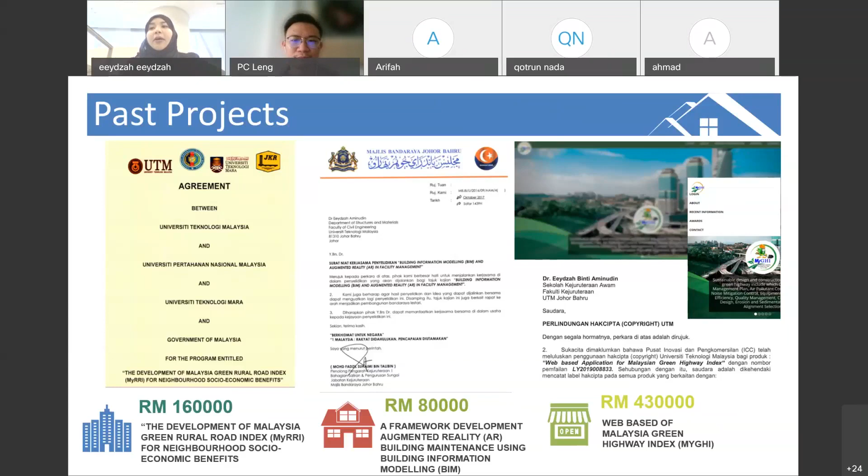So currently, if you can see, this is my previous project. I have several projects together with Dr. PC. Currently, I'm developing the Malaysian Green Rural Road Index. This is under Prof. Rosanna's project. And back in 2017, I did research on AR, mainly for BIM. Currently, I'm one of the team for a web-based carbon calculator for MyGHI, Malaysian Green Highway Index, under Lembaga Lebuhraya Malaysia.

So like I mentioned last week, we just launched the Construction 4.0 strategic plan. I'm one of the technical team with CIDB and CREAM to develop the construction strategic plan.

Okay, a part of my program with all the industry. And currently, if you can look into it, we have moved towards AI, artificial intelligence, and also BIM. So this is what I currently did for my study. Okay, so that is a bit of background about myself, and now we're going to focus again back on

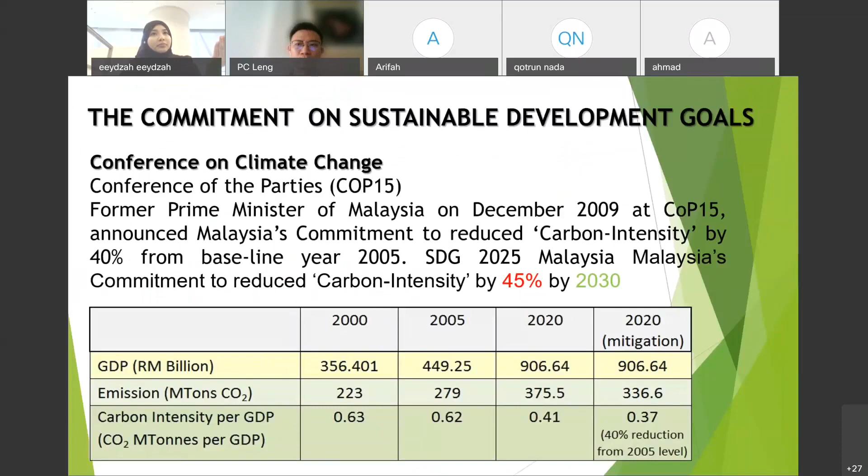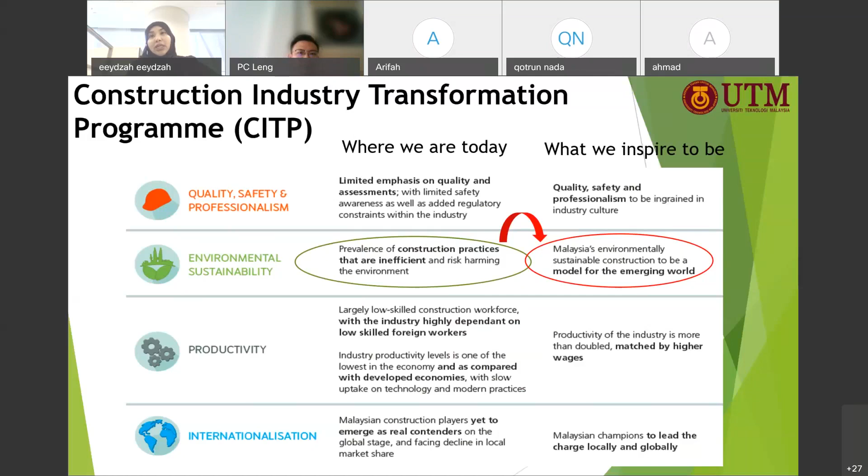So again, I think we skip back, sustainable. Sebab I just want to touch in, kenapa as a researcher, as a student, bila you come out into master's program macam ni, you always have to think sustainability is because our national agenda also is focusing towards environmental sustainability. So if you have an efficient product, a very good product, try to link back with our national agenda, because what you did is actually aligned with what national agenda is focusing.

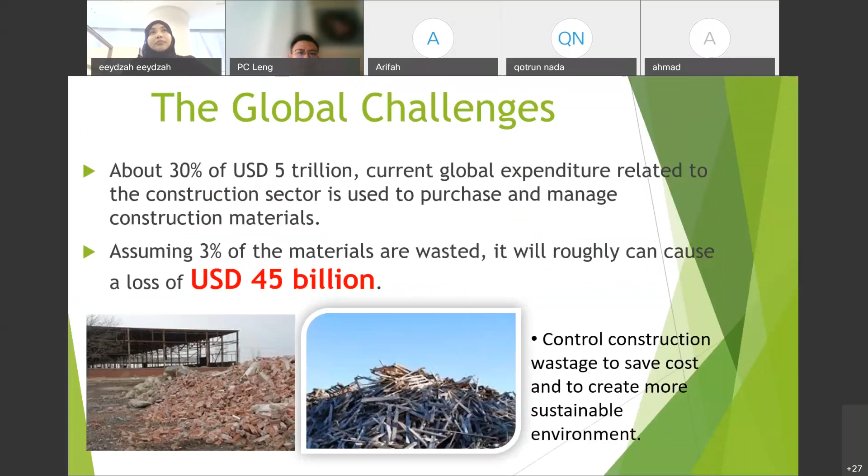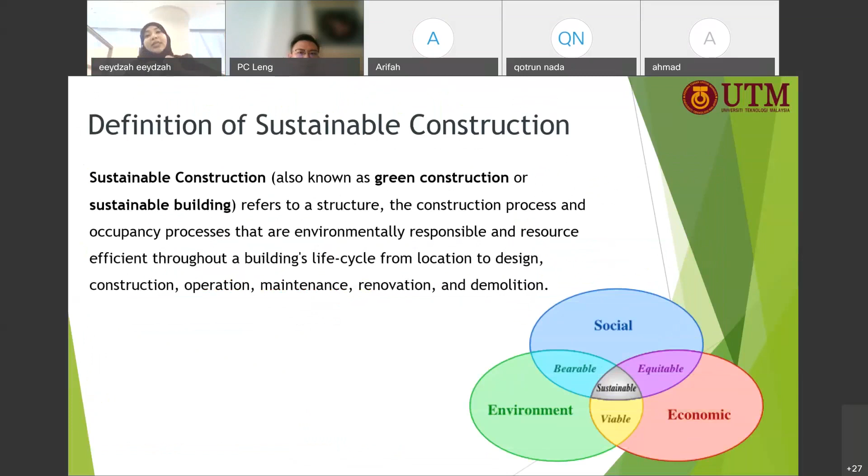And then when we talk about back to our national agenda, sebenarnya they try to reduce the waste. So what I'm trying to do now is actually to combine the idea of bringing the waste into the sustainable initiative. And a part of it, of course, I try to reduce the carbon emission. I can say my research is more on cradle to cradle, kita tak create end product towards waste, tapi instead of that, we use the waste to generate back into a new product that can be used as a benefit product.

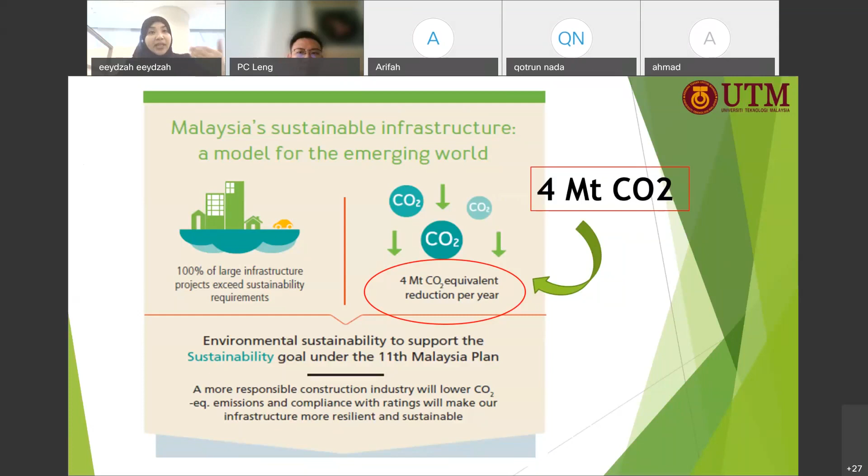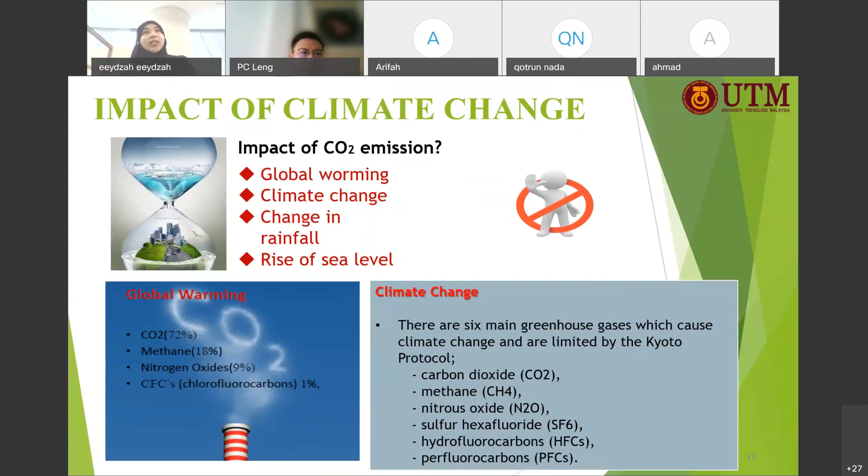Of course, kenapa again kita tengok into the phenomenon of climate change is because why the material that we develop must focus on the climate change issue, because we try to overcome. Kita try to cut off the emissions so that we are not contributing towards CO2. That's the reason why as a researcher, as an engineer, as an architect, you guys have to always think about how to overcome the climate change issue. So coming back towards the thing that we try to bring up for today.

Kalau kita tengok global warming, the urban heat island issue, when it has a high solar radiation, this solar radiation is gonna penetrate into a building. So of course you guys tahu dah pasal what does it mean by microclimate, what does it mean by warmer and cooler. So kalau kita tengok bila kita ada banyak pokok, all this pokok are gonna absorb the CO2. But at the same time kita dah tak boleh nak elak.

In our normal building, of course, when the heat penetrate, all the materials started to absorb. So the phenomenon that happened here, heat going to transfer to our material, and by heat conduction, some of it going to absorb in, and some of it gonna reflect. It depends on what kind of material that we use, but most of the material is going to start to absorb.

And the byproduct, for example, bila kita jalan dekat building tu kan ada exhaust daripada kereta. Okay, they're going to create a waste heat, anthropogenic heat, yang akan menyebabkan heat surrounding tu lagi panas. So you bayangkan bila building tu dah started to absorb the heat, some of the heat dia masuk kat dalam, some of it dia akan release keluar. Ada yang dia tak naik ke atas, so dia akan still stay dekat sebelah kita.

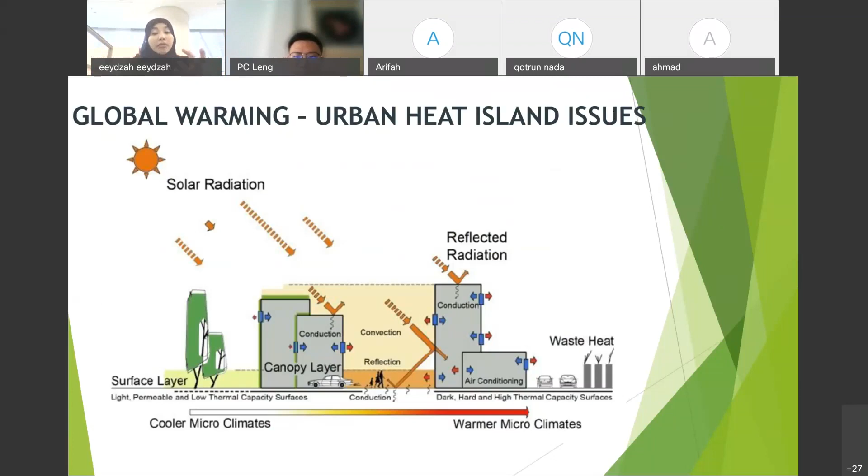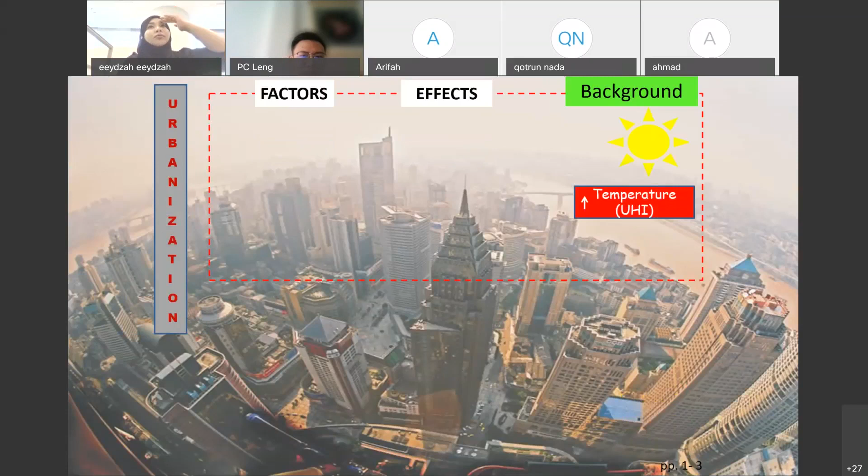So that's the reason why, when we want to start off with doing research, we have to know what is the effect. So when I started to come up with the research, I tried to focus: will the material that we're going to develop actually have the evaporative cooling? Does the material have high heat absorption? Can it produce a lot of waste heat? So these are the things that we have to think of in order for us to overcome the urban heat island issue.

So kalau kita tengok macam tadi yang saya mention, bila ada lots of building, kita akan produce a lot of heat, waste heat. So that comes from cars. Albedo pun very important. Sebab tu macam kita pergi kat Japan, most of Japan they try to have high albedo. So kalau macam warna putih tu satu, but actually it's not good sebab putih ni dia akan sakit mata, tapi sebenarnya dia bagus in terms of dia tak absorb heat yang terlalu banyak.

So that's the reason why we have to know how to play around in between albedo, the heat performance, and our solar reflectance. Sebab solar radiation ni pun dia ada pelbagai value. It depends on our peak sun. Later I'm going to show you what does it mean by heat solar radiation.

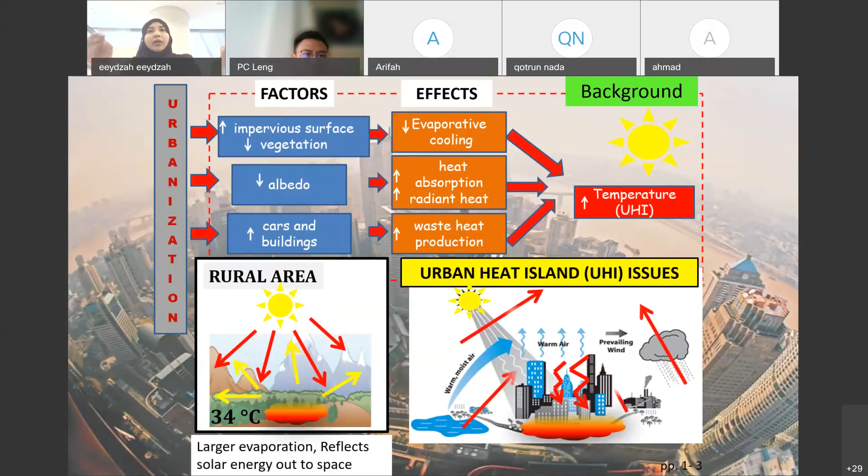So far semua orang okay tak? Boleh ikut tak? Are you guys okay? Do you guys understand my lecture for today? Boleh follow, because it's a bit technical since I'm a civil engineer, so we have to dig in why this thing happened. So if you guys have questions, just interact with me along the way, okay?

All right, so this is the relationship between surface and ambient temperature. If you can see here, during the hot and humid, especially during the midday, when the high solar reflectance, cuba teka. I want you guys to give an idea. In between 12 to 4 o'clock, in our tropical climate, what is actually the peak of the solar radiation? Can anyone guess? In between pukul 12 sampai pukul 4. Sebenarnya pukul berapa? At what time is the hottest based on our tropical climate?

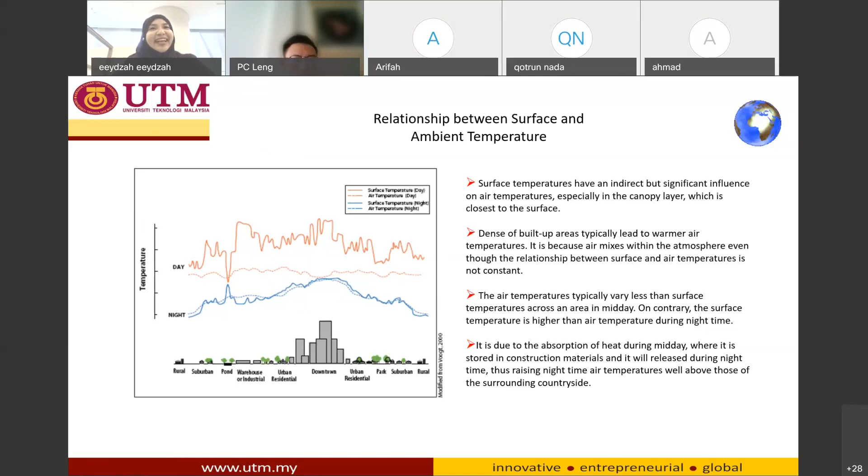3. Okay. 1. Satu. Okay. That's the best you guys can give? 1, 3. Okay, let me show you. Banyak lagi lecture ni. Okay, tak apa, kita cuba cut it short. Okay, actually it is, alamak, tertukar pula.

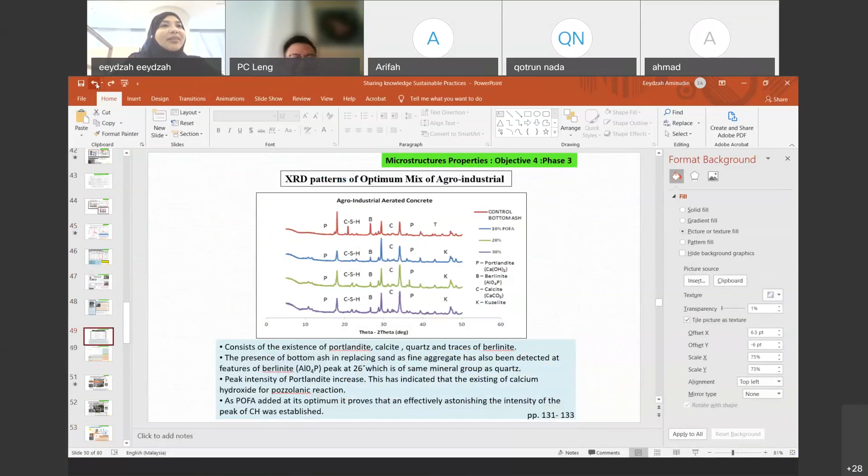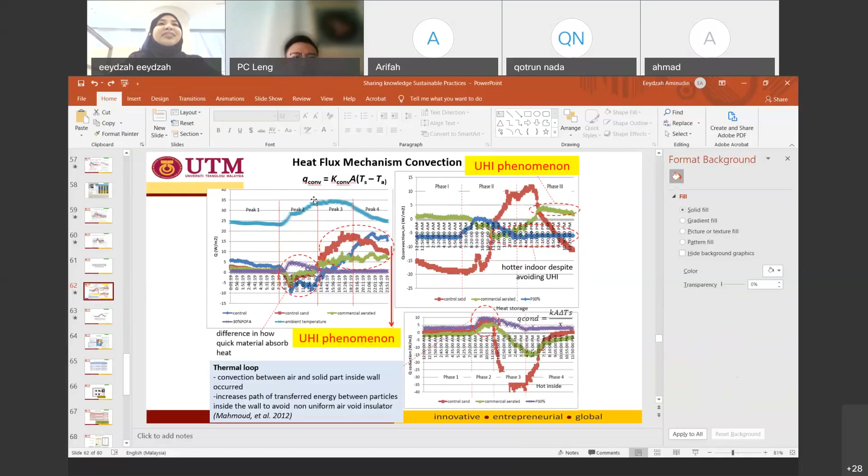Okay, I want to show you it's actually in between 1:45 to, green, red. Okay, kalau kita tengok kat sini, it's actually between 1:45 to roughly the peakest is about 3:30 macam tu. Can see here? Okay, so this is actually the peakest time lah. I mean, it's about 2:45. Nampak tak? Dia punya peak.

So this is actually our peakest point in our tropical climate. So jangan keluar lah. In between 2:45 roughly kan. Start pukul 1:45 ni sampai pukul 3:04 ni is actually the peakest point of our tropical climate. Okay. So betul lah tu, pukul 1, pukul 3 tu betul lah. Sebab this is actually the peakest hour, peakest point. Okay, nanti I'll show you the solar radiation later on. Dia actually based on solar radiation lah, sebab kita akan tengok our solar radiation. I'm gonna show you later on.

Alright, so far can follow? So sebab tu it's quite dangerous lah if we go out in between 1 o'clock to 4 o'clock tu, kita boleh terkena heat stroke. That's why it's very important for you to know the peakest point. And normally my students kan, kalau dekat construction industry, a lot of my students, especially yang dekat PNB ni, diorang memang banyak yang kena heat stroke. Sebab the higher altitude you go, the higher tendency of heat stroke that you guys gonna face.

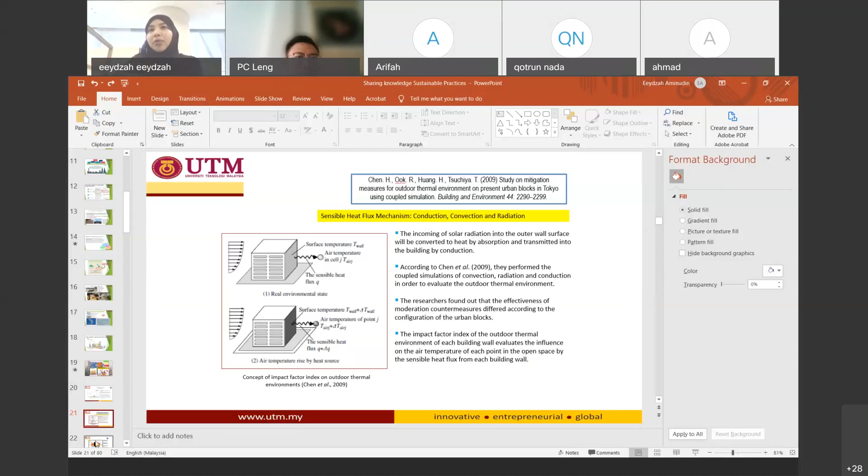So it's very important for you to know which exactly time. Kalau waktu hujan is okay, but if it's hot tropical peak hour, it's not good for your health. So try to know, okay, you know already 1:45, so boleh tapi you kena berjaga-jaga lah, minum lots of water, so that heat stroke will not occur at your body, right? So

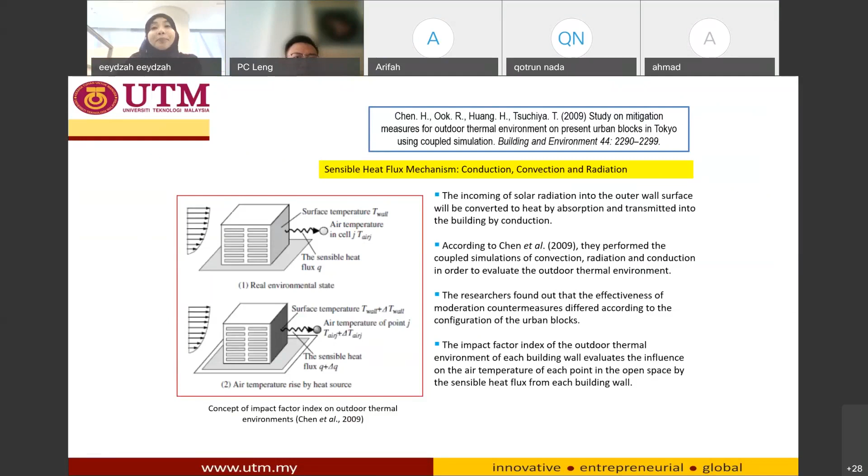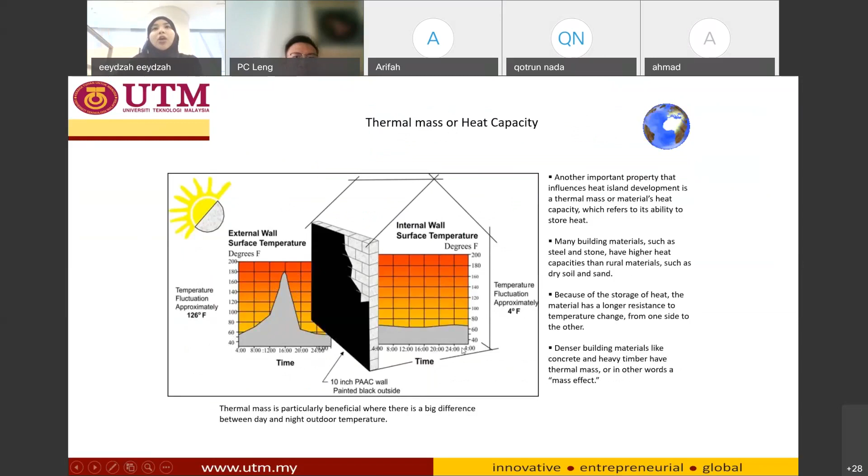Okay, for my research, basically what I'm doing is that I try to get an idea what is actually the external wall surface temperature and the internal wall surface temperature in terms of aerated concrete. So looking back on the conceptual idea on how the heat transfer is, kalau kita tengok solar radiation, panas matahari, the sunlight, they have this solar radiation, and this solar radiation gonna radiate at our surface of any material. We're talking about building. Sekarang ni I'm talking about building, and the radiation will increase dekat surface temperature.

In order for you to develop, to think of what is actually the suitable material, is to have the one that have a very less heat flux. Kita nak a very less thermal mass, because kenapa kita nak material yang absorb rendah dekat dalam material, sebab every material memang akan absorb heat. Tapi material yang absorb the less is better, sebab dia tak akan simpan the heat flux dekat dalam, the thermal mass. So in order for you to do a research is to have a very less thermal mass, and basically we are looking into the very low thermal conductivity.

Sebab lagi rendah thermal conductivity, the better in terms of thermal insulation. So that is the idea, to have a very low thermal conductivity, but at the same time a very less thermal mass, sebab kita tak nak heat simpan dekat dalam kita punya building. But of course they're gonna keep in, but some of the material is gonna release cepat. So the good thing about the material that I produce is that dia simpan haba sekejap, dan dia release haba pun cepat. So nanti I'll show you, pukul 6 tu dia dah start to release the heat dalam material, sebab of course semua building dia akan serap haba, tapi yang mana yang lepas haba cepat, itulah yang very good. That's why if you can see for the low cost house, normally they are using sand brick.

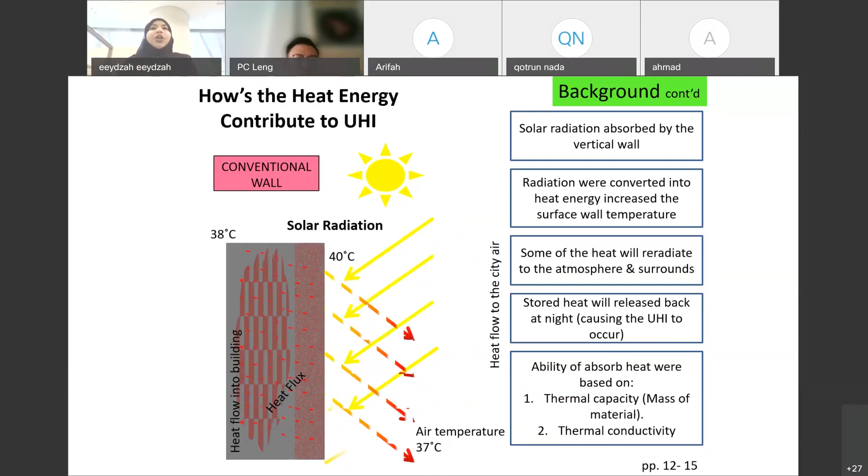Okay, so again, this is actually the heat transfer process. Bila kita kata kat luar ni, ni contoh dekat bahagian luar, sini bahagian dalam, solar radiation dia transmit dekat kita punya bangunan. Depends, ada yang long wave, ada yang short wave. Kalau long wave dia akan keluar, ada yang reflected, dia akan keluar.

Okay, dia pantul dekat material, dia pantul balik. Maknanya kalau when the solar entered to our material, part of it going to radiate, reflect back. So it depends, some of the heat akan transfer. That's why we have to study in terms of the material performance.

Antara dia, macam I mentioned just now, thermal mass and also thermal conductivity. That is the main yang kita boleh nampak secara material, yang kita boleh buat terus study, kita boleh test terus, adalah thermal conductivity dengan thermal mass. So from there we can actually identify the potential of this material, is it good or not.

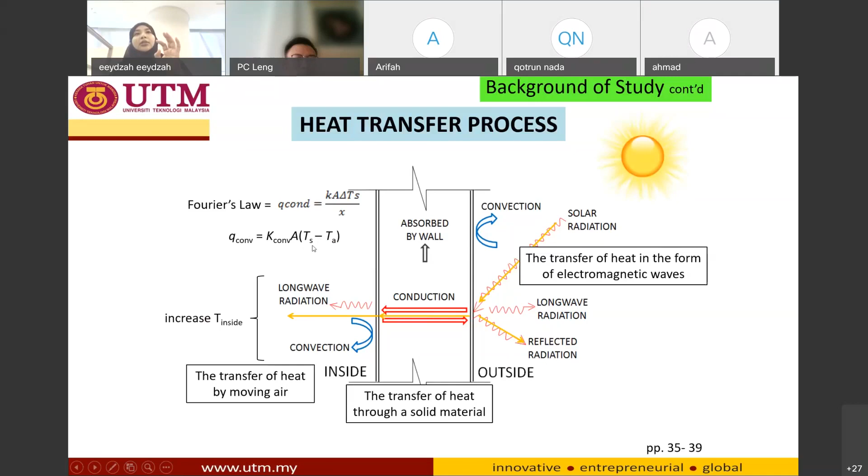Okay, so adalah beberapa equation that we have to calculate in terms of calculating the heat convection. This is convection, we have to know the K convect, and then the area, the surface, and also ambient temperature. So there's a few equation untuk kita kira the heat tu sendiri.

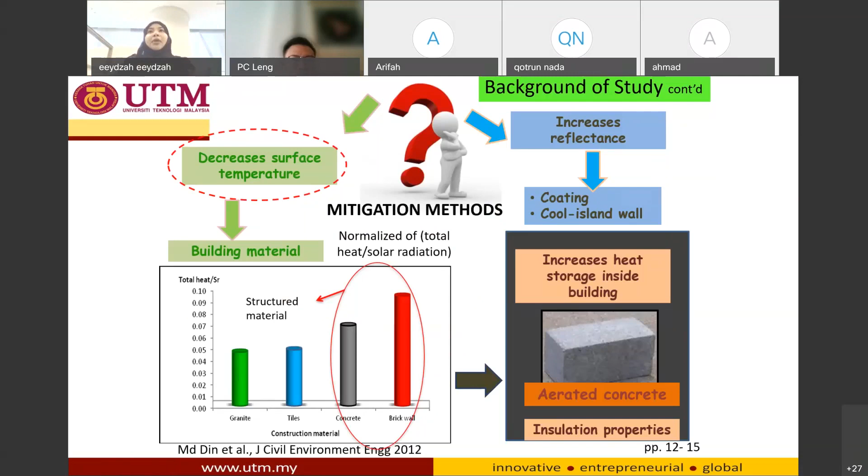Okay, so looking back into our aerated concrete, normal aerated concrete dia punya density is ranging in between 400 to 900. Like I mentioned just now, when we talk about lightweight concrete, it must ranging in between less than 1800. So apa-apa material which is less than 1800, it is considered as lightweight.

And the properties of normal aerated concrete, kalau you tengok, dia small pores and dia very even, compared to this is my brick, dia uneven. Tapi kita tak guna high steam. Sebab kalau you tengok kat atas ni, normal aerated concrete dia memang pakai high steam, that's why dia mahal. Tapi tadi kita nak cakap, kita nak try to cut cost, kita tak nak guna high energy, that's the reason why I try to reduce. Tapi ada drawback sikit sebab dia uneven pores yang terbentuk.

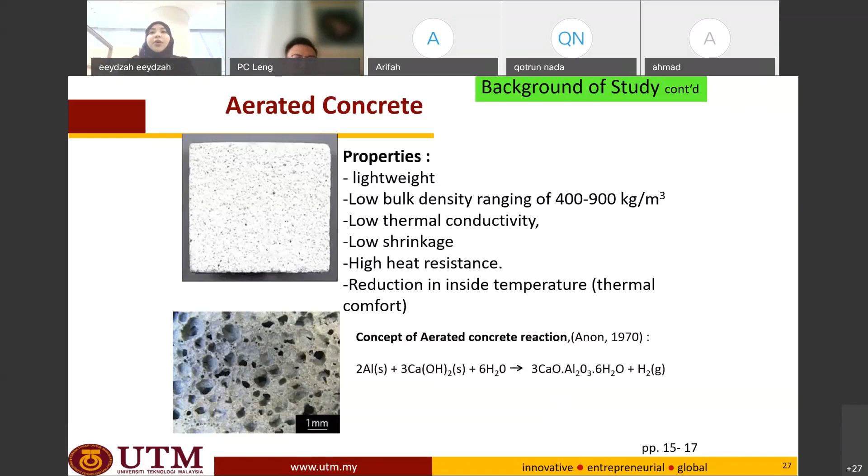Okay, so kalau kita tengok konsep aerated concrete sebenarnya dia ada alumina. Tadi kita cakap dia pakai aluminium, dia pakai simen dengan air, lepas tu high steam. So dia akan develop calcium oxide alumina yang akan membentuk ettringite. Ettringite ni macam itulah dia punya strength dekat konkrit tu. Nanti I can show you guys later what is the mean by ettringite. So ettringite ni sebenarnya yang membuatkan aerated concrete tu kuat, dia punya pembentukan. Sebab sebagai civil engineer, you need to know how the development, the properties of sand and cement, macam mana dia bentuk kekuatan tu.

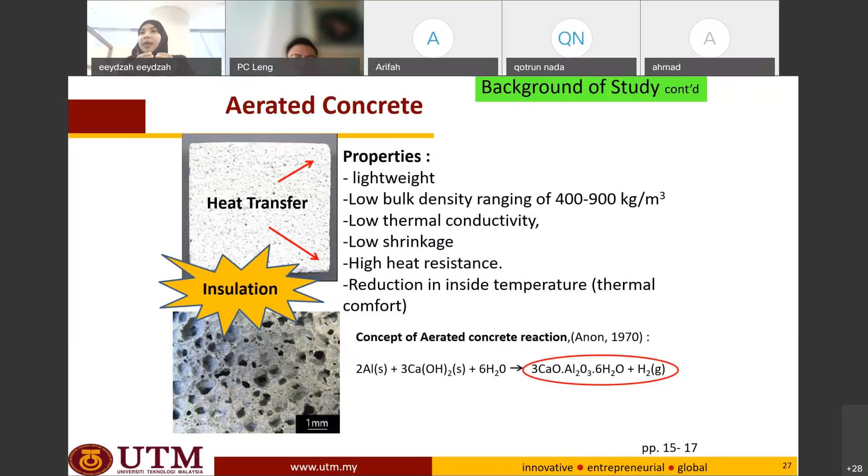So kalau macam normal, kita panggil heat of hydration kalau normal concrete. Kalau kita tengok concrete terbentuk kalsium campur air, campur pasir, dia akan bentuk calcium silicate hydrate, so that is normal heat of hydration. Tapi dalam sistem aerated concrete, dia lebih kepada ettringite. I'm so sorry, it's a bit technical, but this is actually how it develops.

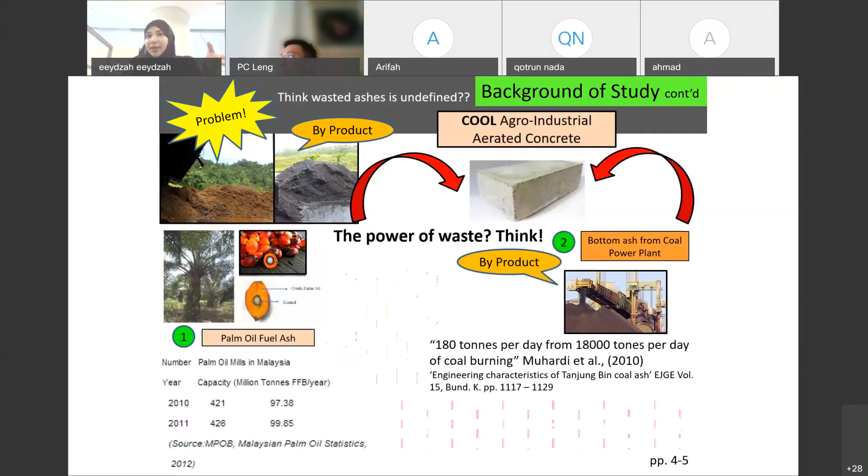Okay, so what I'm doing actually, just now saya mentioned bottom ash, I replace sand with bottom ash, and actually cement, I no longer use cement, but instead of that, using fly ash. So fly ash also, it has the same property as cement. Okay, so that was the thing that I did.

And then kalau kita tengok previous study, sebenarnya dah orang buat 2009. My PhD research is during 2010, I started my PhD 2010. So 2009 tu sebenarnya dah ada orang buat bottom ash replace as sand. Dan kalau kita tengok, tadi I cakap the lesser the thermal conductivity, sebenarnya the better in terms of the performance of insulation, so memang betul. This has been studied by Kurama, dia tukar bottom ash dengan sand, memang thermal conductivity tu makin lama makin rendah, sebab the porous that produce inside the aggregate contributes to insulation.

Okay, and back in 2013, Lim pun dia ada study, dia pakai POFA, palm oil fuel ash. Tadi bottom ash, kalau kita tengok kat power generation, electricity, yang jatuh kat bawah tu bottom ash, yang dekat atas tu is actually POFA, top ash. So POFA ni palm oil, bottom ash ni daripada coal power plant. Sebab tu I combine agricultural waste dengan industrial waste into my aerated concrete, so this is what I did.

So kalau kita tengok pun kat sini dia bagi tahu apa tu thermal conductivity untuk POFA 20% dia makin increase, tapi dia tak study sampai 30%. Yang ni maksudnya dia pakai zero, tak ada apa-apa waste, 0.65.

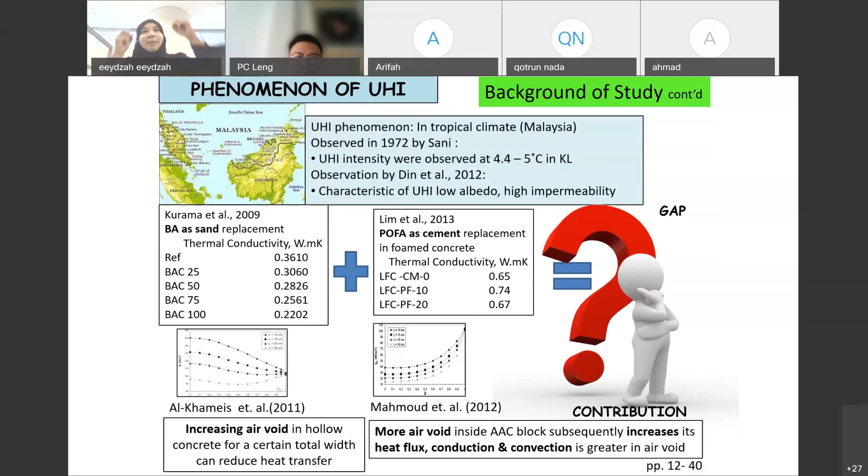It's okay, because the first year for me was my learning stage. After the second year, I got an idea for this and I went ahead and got an initial idea that actually worked, by using what we call a preliminary study. So what I did is use my preliminary study.

Like earlier, we had the idea that bottom ash and fly ash could be integrated. At the same time, as usual when you become a researcher, you want to try everything. So I did the same thing. This one is expanded polystyrene - I'm using EPS, mixed with cement, and tried to study its behavior.

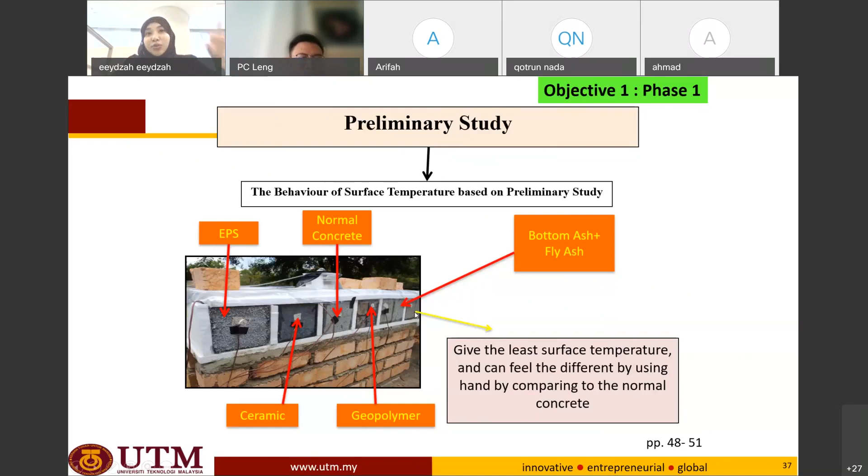At the same time, there's normal concrete, and this one is the bottom ash that I did for my research. So I just mixed around, played, and tried to test it. Fortunately, the result shows that the bottom ash, if you look here, has the least thermal heat. If you look at surface temperature, it's the lowest. So that is how I started to do my research, by having a preliminary study.

So I think there is a potential in doing this research. That's how I started off with my research. It shows that bottom ash has the least thermal effect.

Then I started to study again - when you research, you do it more, and you study its chemical composition. We have to know, like I mentioned, for concrete strength, silica and alumina are very important. So I looked into the bottom ash - the silica is 42%, very high. POFA is also very high compared to normal portland cement. So I thought, wow, there is a potential. We can see here the alumina silicate is also very high.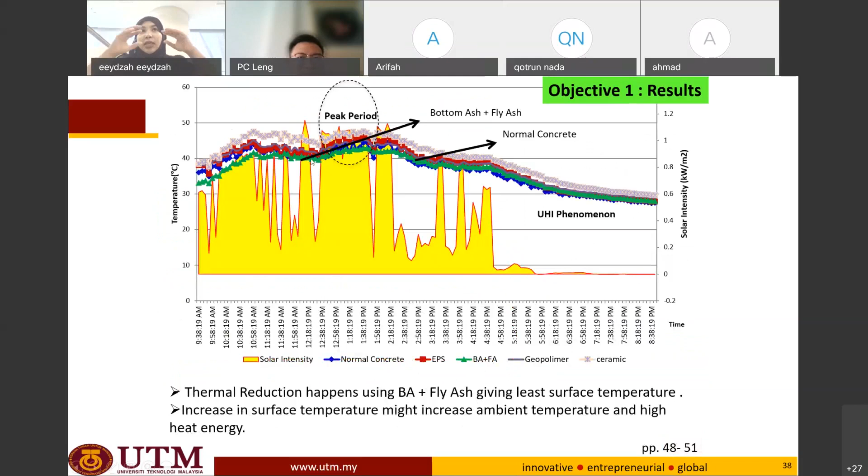Then when you study many papers, no wonder bottom ash, if you look earlier, has the least surface temperature - the heat absorbed is lowest in bottom ash. So then I tried to think - when I read, it turns out silica, alumina, ferrum and titanium have a reflective pigment. So the material that I created has reflective pigment, and it also has insulation behavior.

So I started to become happy. After a year of it not working, you change your topic, you do it again, and you see there is a green light in your research. So you start to become very ambitious. During this time, after 2 years, when you're down and you see your green light in front of you, you started to be happy.

So I tried to start doing lots of study, lots of samples - about 120 samples, some worked, some didn't, we tried everything. This is how I developed my mixing phase, whereby I'm adding the POFA, the cement, the hydrated lime, the bottom ash, and then adding aluminium powder and superplasticizer. The good thing about aerated concrete is it acts like a muffin.

If you mix it, you can see it - actually it will rise. You mix it, fill up 2/3 of the mold, and it will rise. So you'll see it become like a muffin, and you cut it off. So you know it shows your material started to rise. This is because aerated concrete is like foam concrete - there are holes created, aerated, created inside.

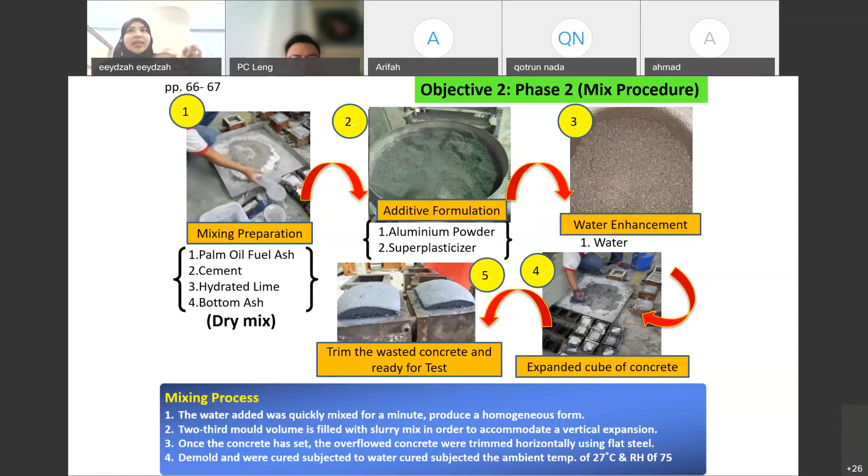So this is how I developed it, and there's a lot of study I had to do looking into the aluminium percentage, the superplasticizer percentage. From here it shows that, every time we do research on a material, we have to check the compressive strength.

So of course the control strength is very high because it is not aerated, it has no porosity. But compared with control sand and control bottom ash, it has quite similar performance. So as long as it's achievable, for a normal non-load bearing wall, we need to achieve at least 5 megapascal. So at least I'm achieving the standard requirement of UBBL.

Some more, when I add up POFA, it actually gives long-term strength, so it is high strength at later age. That's why this pozzolanic behavior creates high strength after 40 days. So that's the reason I thought the strength is going to get better over time. That's why I think it's okay, since I did achieve at least 7 megapascal.

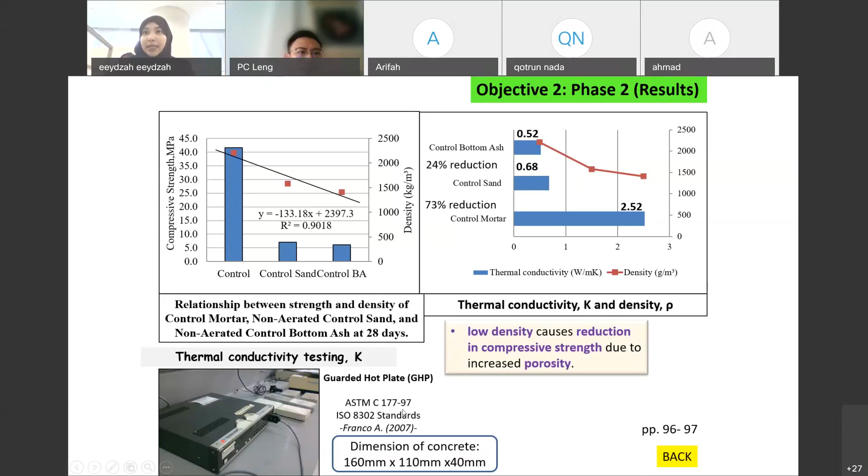Here I went to MPOB to do this thermal conductivity testing. It follows ASTM C177-97 standard. So this is my mix proportion.

Again, the compressive strength that I get - remember I mentioned, POFA, when we put pozzolanic material, it will create high strength. So after 7 days, if I'm not mistaken, we check, and after 21 days I check. It shows that 10% is actually an optimum design based on literature. They say 10% is optimum, but when I did my own research, I found out that 20% is actually the best optimum design. But then again, because I want lower thermal conductivity, I chose 30% since it's still acceptable in terms of compressive strength.

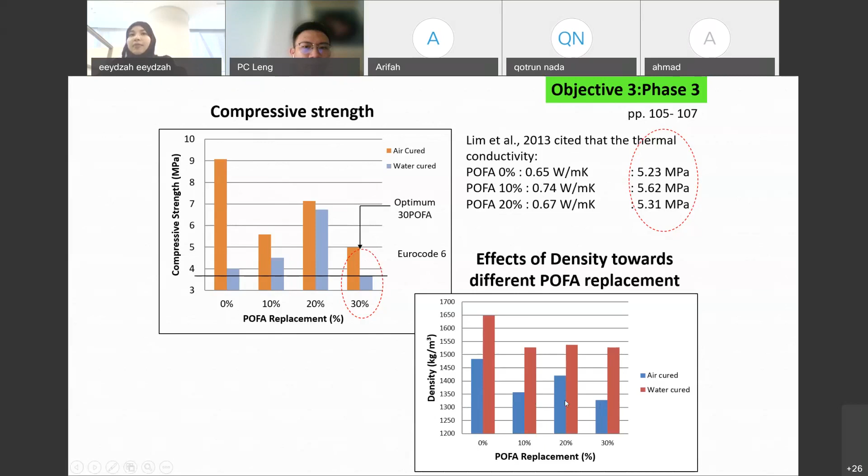This is the density. Like I mentioned, the lower the density, the better. So this is lightweight, since my material is just roughly about 1300 kilogram per meter cube.

Again, this is a study on a very technical aspect. I'm looking into the contribution to strength, and it shows that it has quite high void, but it's still acceptable, because if we look at absorption percentage, for good concrete it should have less than 3%. POFA has 6%, but it is considered acceptable because it doesn't create mold on that particular material.

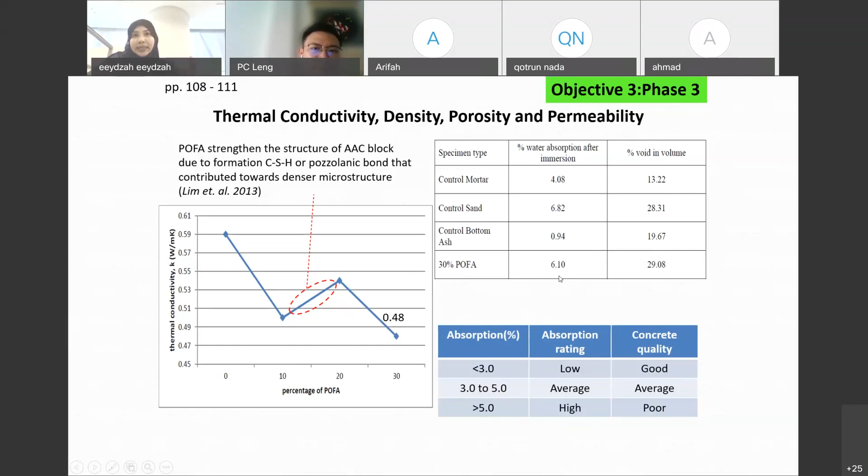So again, this is looking into the density, ranging in between 1200 to 1500. The compressive strength is 5 megapascal. I'm looking at the lower thermal conductivity, which is 0.48, as compared to commercial which is 0.3 to 0.5. But commercial uses high steam, so we try to ignore the high steam, and the porosity created is about 32% as compared to commercial which is about 70%. So it's still acceptable in our condition for this material.

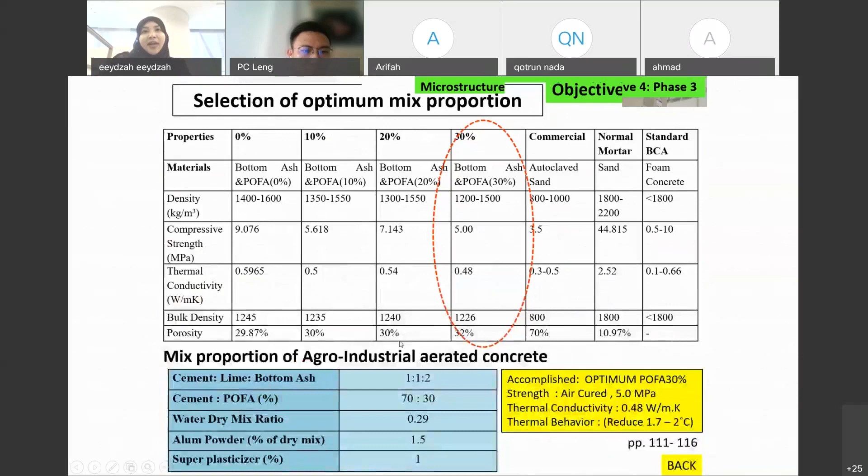And this is what my material looks like - you can see small holes were created, and I define the 32% porosity using mercury intrusion porosimetry. I did the test in Japan. I'm looking into the interparticle pore and also intercluster pore. Actually we can dig in more, we can learn more about what interparticle and intercluster mean. That is actually why there is a significant value in the thermal heat insulation performance, because there is a pore created in this material.

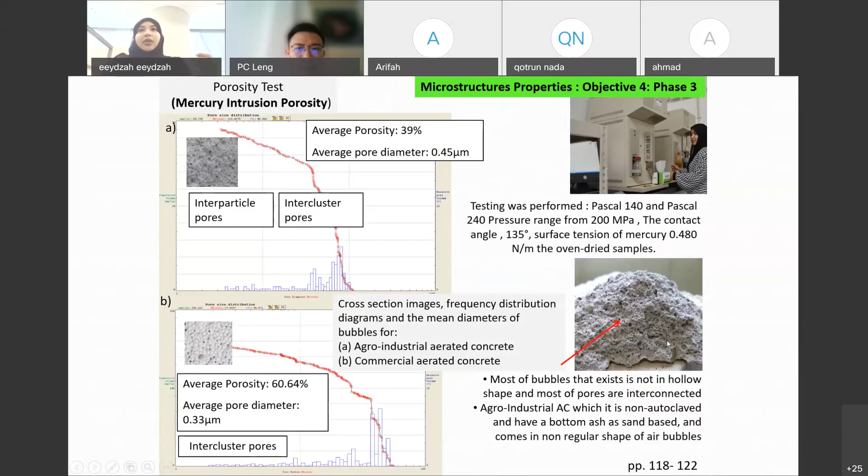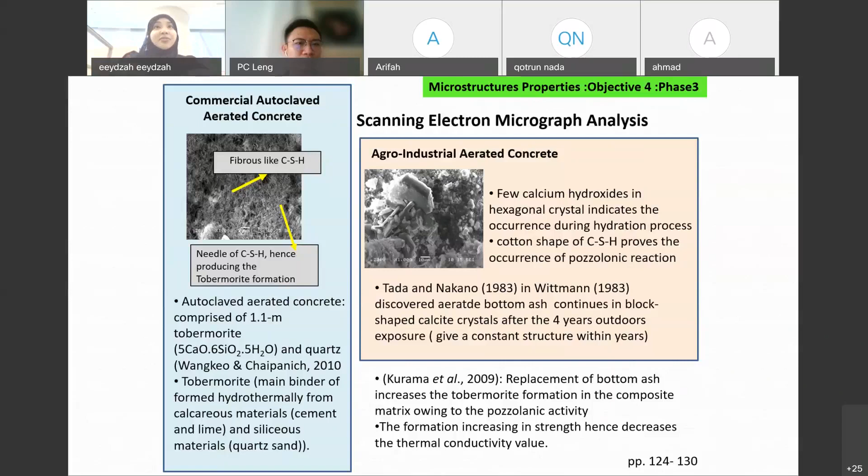Then again, I'm looking into the XRD, X-ray diffraction analysis.

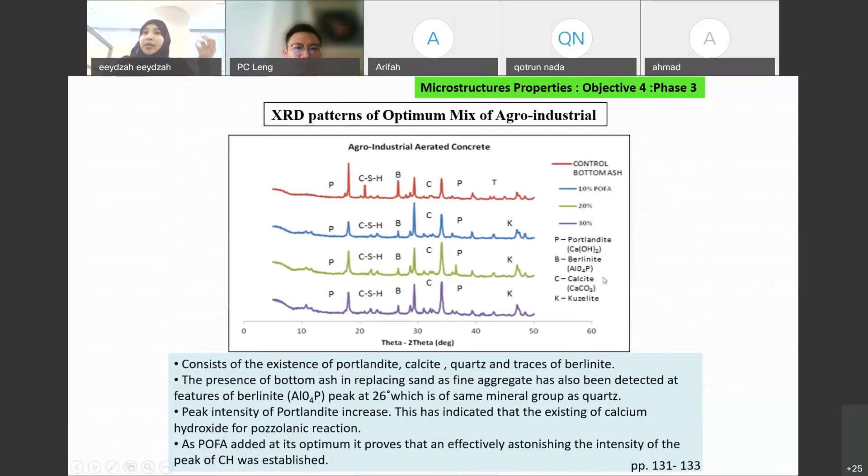How the behavior of this strength created 35 megapascal compressive strength. So how it's created, I have to go into the micro scale, and looking into that, apparently within the material itself, it has portlandite, berlinite, calcite, and kuzelite. So CSH is also being created. Calcite is also quite a lot, and that's the reason why the strength is there. Okay.

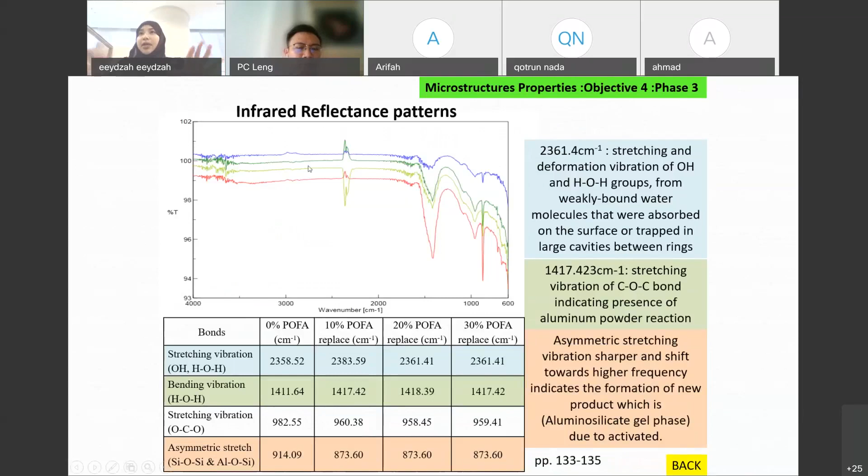This is regarding the strength as well, but I have to skip this. I think it's very technical. All right, but this is the thing that I'm going to show you as architecture students. This is how I studied in terms of thermal behavior, whereby I have a pyranometer. So is there anyone who knows what a pyranometer is?

Well, guys, can anyone tell me what actually a pyranometer is? Is everyone still there? No. Anyone, students? Just guess. Well, guys, come on. Christine Young, maybe. Can you tell me what actually a pyranometer is? You have Google. You can Google. Christine? Maybe Shahrudin? What is actually a pyranometer?

Anyone still there? Measuring. Okay, measuring solar. Koa. Is it Koa? Koa. All right, yeah, good, Koa. Measuring solar. Okay. What skills are they using? Measuring solar. Is there anyone of you that has used a pyranometer before? Nope. Koa, nope. Arifah, no, never.

Belinda, okay. All right. So this pyranometer is actually what measures solar radiation. Okay, correct, what Koa meant, solar. Solar radiation. So, as I mentioned, the solar reflectance amount is actually calculated based on the pyranometer, right? So I'm using the pyranometer to get to know the critical solar radiation on that day.

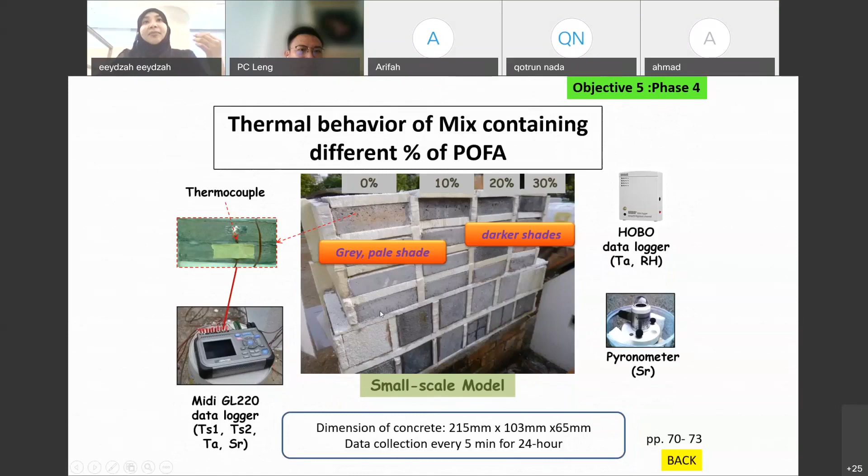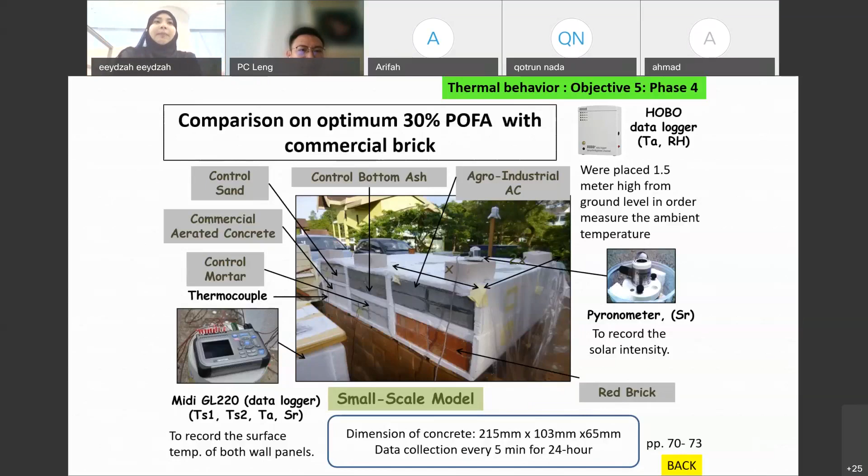So I'm measuring again after I identify, based on 0, 10, 20, and 30, what the optimum value is. And then I compared again with red brick, control bottom ash, control sand, and also aerated concrete. So from here, I did another study over almost a month, in order to check the critical maximum point of solar radiation. Because when you do research, you need to know the hottest time. We have to take the peak, the hottest. So that's why I checked over a one month period, and chose the one day with the highest solar radiation. So this is how I did my study.

Whereby I check the reflectance. I check the incident solar radiation by using the pyranometer. I also have the HOBO data logger to check the humidity on that particular day, because we want to insert the Q convection and Q conduction, the heat of conduction and heat of convection. We have to know the humidity. And I need to know the time lag.

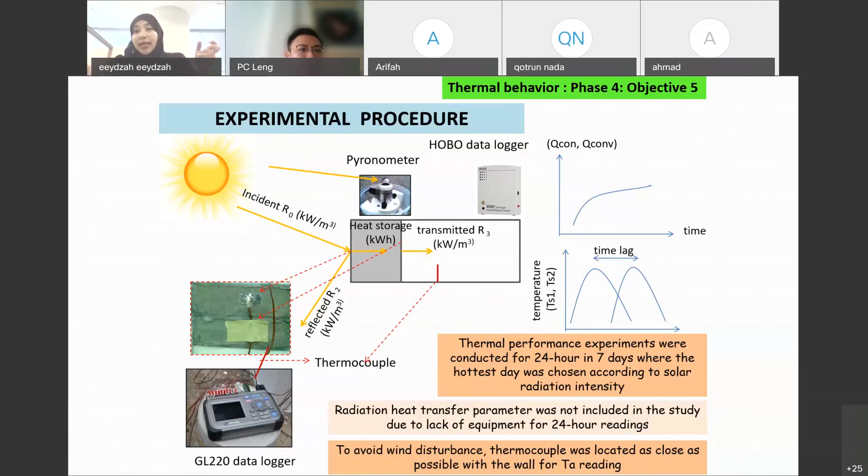As I mentioned earlier, every time heat is absorbed in the material, it creates thermal mass. This thermal mass stores and releases heat. So how long it stores and how long it releases, we call it time lag. It's very important for you to study the time lag as well. That's why you need to know when it starts to absorb and when it starts to release. So these are the things that I studied.

After studying for one month, I found out that the maximum peak is actually on 11 November. Oops, not just 11, 11 November 2012. This is actually the peak point. And if you can see, like I mentioned just now, the solar radiation peaks around 1 o'clock, it depends on the day, but basically it runs from 1:30 to 3:45.

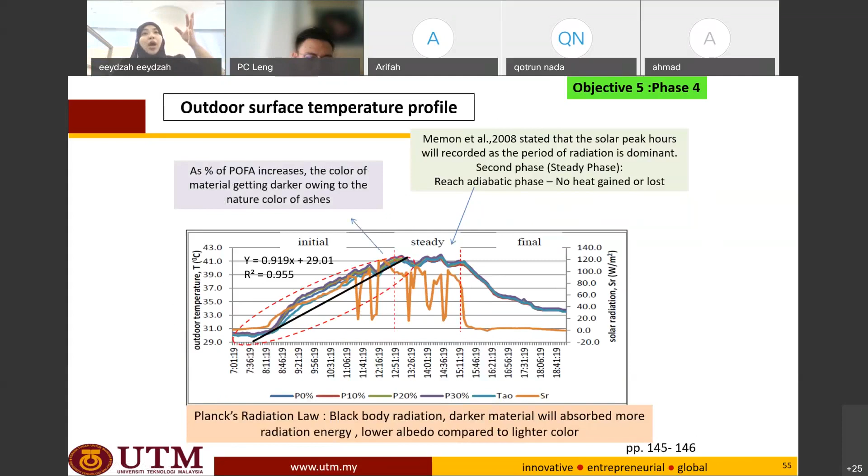Okay, and then kita tengok balik kepada kita punya ambient temperature. So from there, I'll zoom in and I studied again the performance on the solar radiation and also the outdoor temperature, surface temperature, and indoor surface temperature. I did compare and I look into how the performance of thermal in and out, the heat convection and conduction.

And from the result that I got, it shows that 30%, you can see here, the time lag is longer. So depends, if you're looking into a very good thermal insulation, we want to have a high time lag. But if you're looking into a very good thermal performance yang serap haba cepat dan release haba cepat, we are looking into the very less thermal time lag.

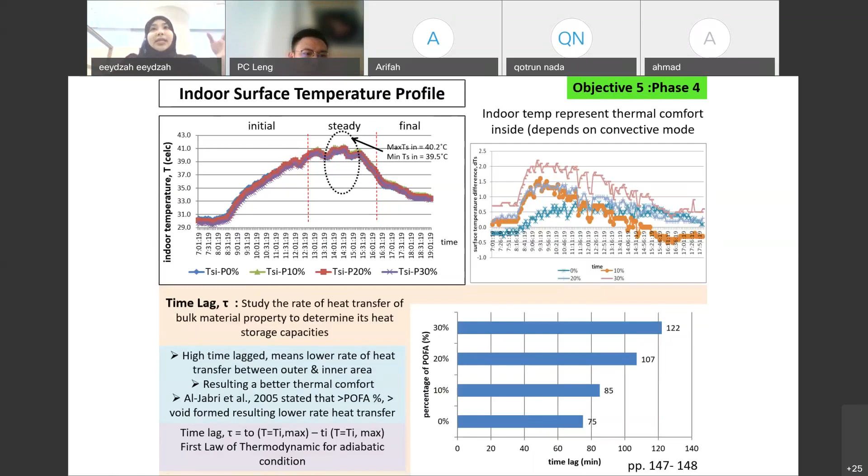But then again, kita kena tengok macam-macam possibility sebab even 0% it has a lesser time lag, tapi sebab kita nak tengok the behavior of insulation, kita tengok juga heat of convection, conduction. So it shows that yes, correct, 30% has a very high thermal insulation, but then again looking into the reflectance, kalau kita tengok kat sini, heat of convection ni maksudnya dia absorb and dia release balik that I mentioned to you.

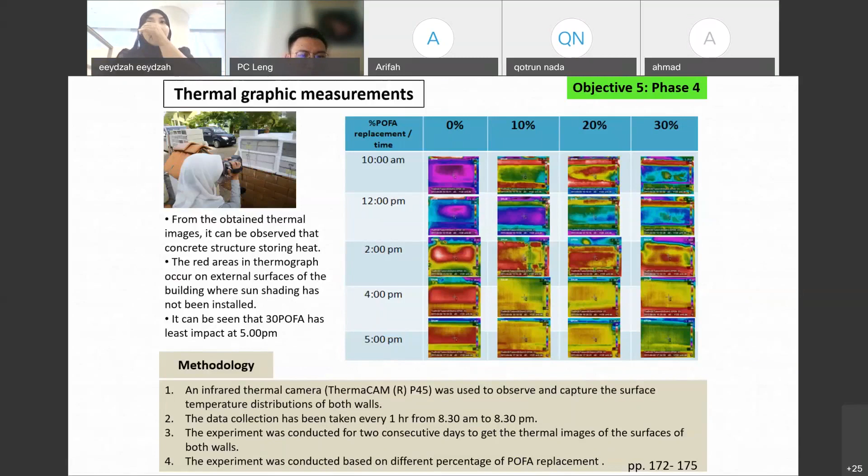So this is the reason why it is good in terms of heat of convection, tapi time lag pun dia very good sebab dia simpan haba lama dekat dalam material. So this is what I call as stored the heat, and it started to release also very fast. You can see here, heat of conduction, dia started to release, kalau untuk 30%, dia on top. So kalau positive value, it release the heat faster as compared to 10%. So this is how it behaves.

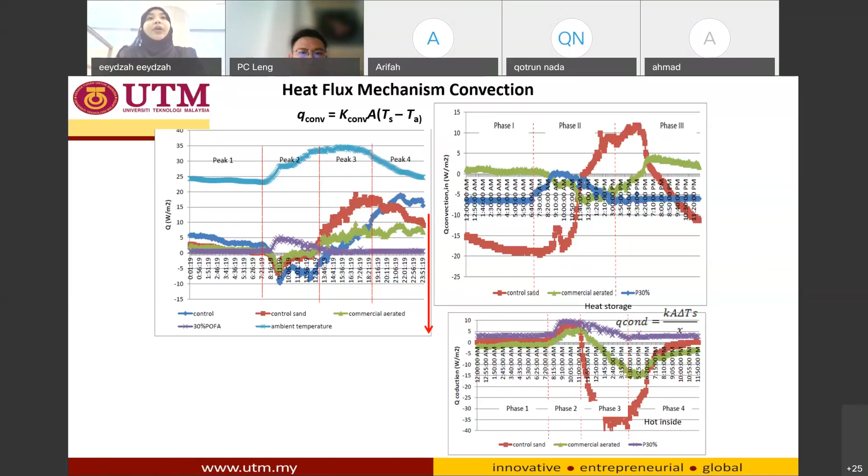30% I can say is the best, even though they have a very minimum in terms of strength value. Tadi kalau kita tengok strength dia 5 je, tapi at least they achieve the value. Right? So that is how I come up with my research, and it shows that 30% it does improve. Dia dapat kurangkan 2 degrees Celsius. If you can see here, dia punya comparison degree is about 2 degrees.

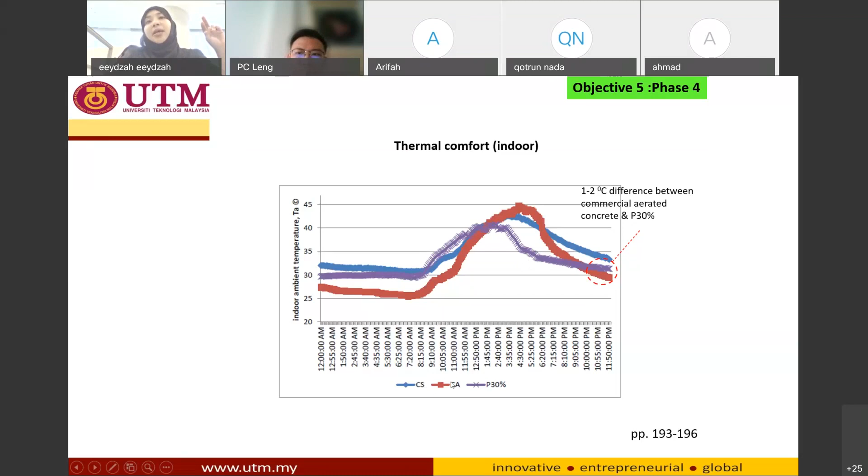So again, I can conclude that my material, dia punya thermal insulation tu very good, tapi it depends sebab kalau kita panas, thermal insulation yang terlalu tinggi pun tak berapa bagus. Tapi yang very good thing is that it absorb the heat fast and it release back the heat also very fast. Sebab tu again, bottom ash ni is very critical to be used, to be utilized, since it has a very good insulation property.

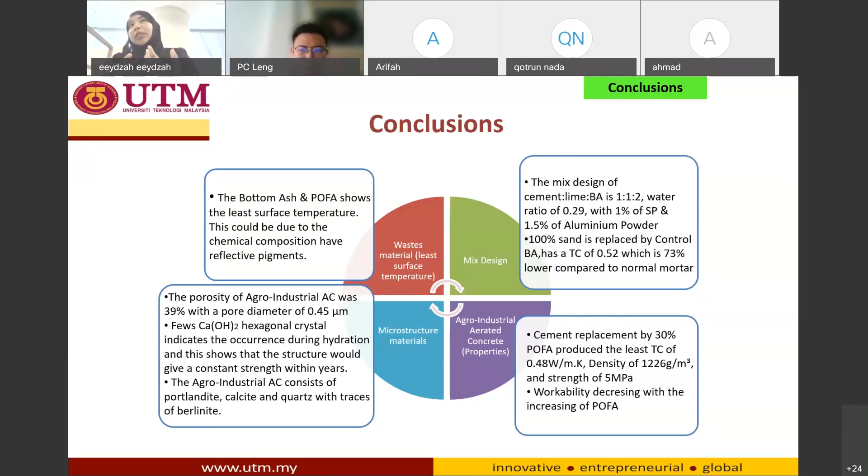But then again, it improve in terms of urban heat island climate, whereby kita nak dia serap dan dia lepas haba pun very fast. Saya tak tengok in terms of very whole scale, I'm looking into the small scale, but looking into the small scale pun dia tak terlalu simpan the heat, and it good in terms of giving the human comfortability dalam bangunan. Sebab that is the most important. Kita tak nak haba tu tersimpan dalam bangunan, kita nak haba tu dilepaskan. Okay. So that's what I get from my research.

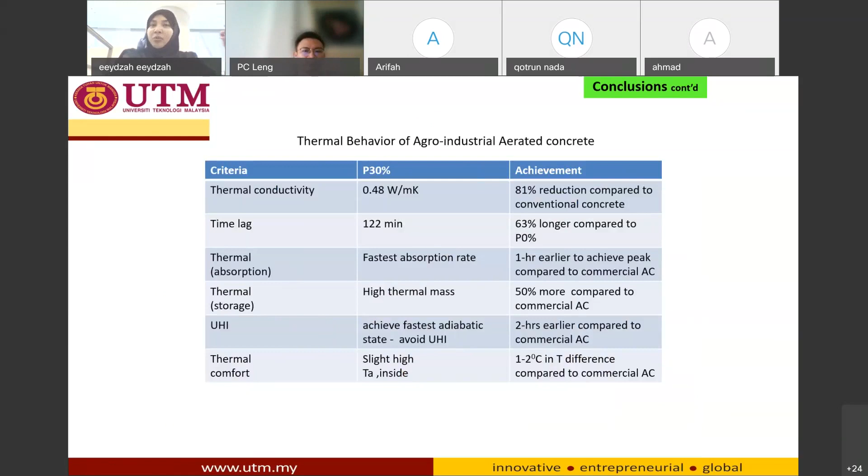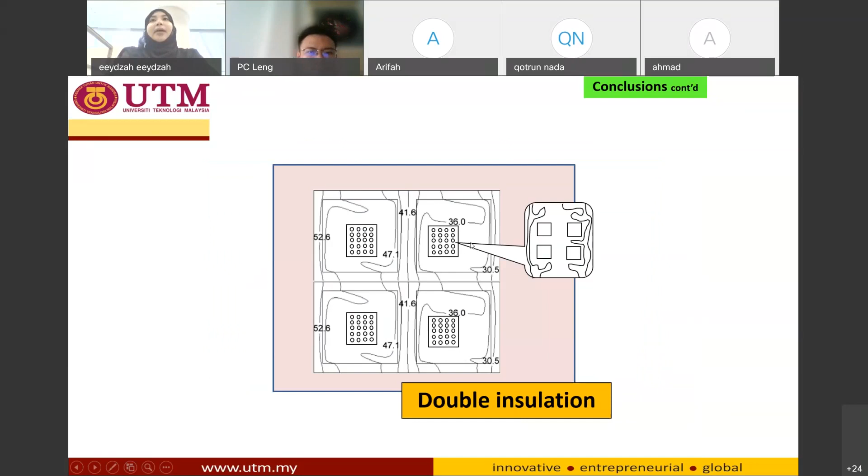I mean, in terms of performance, it's very good, but in terms of strength, it's not really. That's the reason why research is there. We have to always improve, looking into the aspect of material. What kind of material actually can improve the strength, right? So I can say that my research here is double insulate. But then again, we have to improve by time.

So that's it. Okay. Recommendation again, I'm looking into the air circulation later on. All right. So that's it.

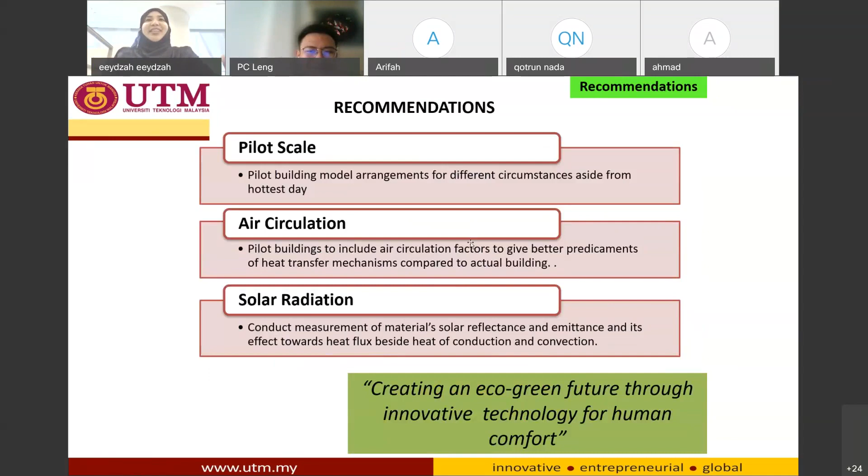Dr. PC. Okay, thank you very much, Dr. Eeydzah. You're welcome. Okay, hope it helps.

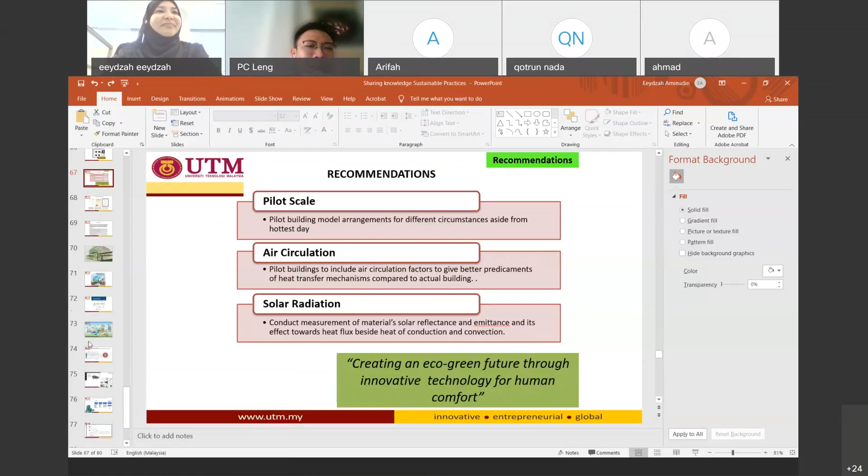Yeah, I think very interesting, and I hope that students really learn and understand about one of the sustainable materials that they could apply other than just using those conventionals on the market itself. Because this is one of our so-called local inventions, which is quite widely studied in the Malaysian context. Am I right? Yeah, because I know POFA, bottom ash, fly ash are things from the palm oil that we have produced quite a lot in Malaysia. Hence, we have the potential, in the local context, to use these materials to produce sustainable materials for the construction industry.

Okay, now I open up the session for students. Any questions from the students? So you may try to ask Dr. Eeydzah while she is still here. Please grab her, okay? Anything that you wish to ask about the sustainable materials? Maybe about design, about the products, or maybe about applications that you doubt and you wish to know. If you are shy, you can type in the chat box here. Please ask. Dr. Eeydzah is very helpful. Hopefully you guys understand. Did you guys understand? It's quite technical.

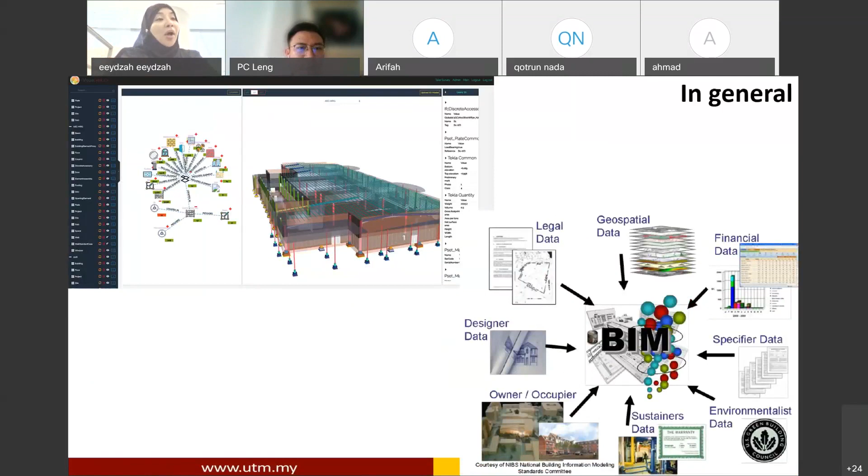What I'm trying to focus on today is that after my research, I'm now more focused on the integration, what's next. I already came up with the idea of thermal insulation for brick. How I want to check the performance is actually by creating energy management. So Dr. PC knows about this. Dr. PC is a part of the team. We have master students that work on this.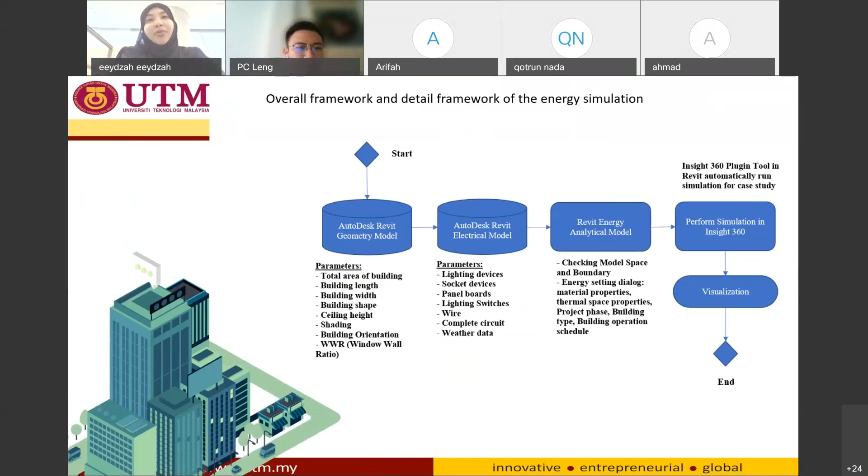From BIM, we are using Revit as a model. We can actually have the idea of integrating the thermal performance. So basically, this is a part of how the simulation is being conducted, but I just want to show a part of it whereby, from the idea of thermal performance integration, we can get the idea of how the simulation is being performed.

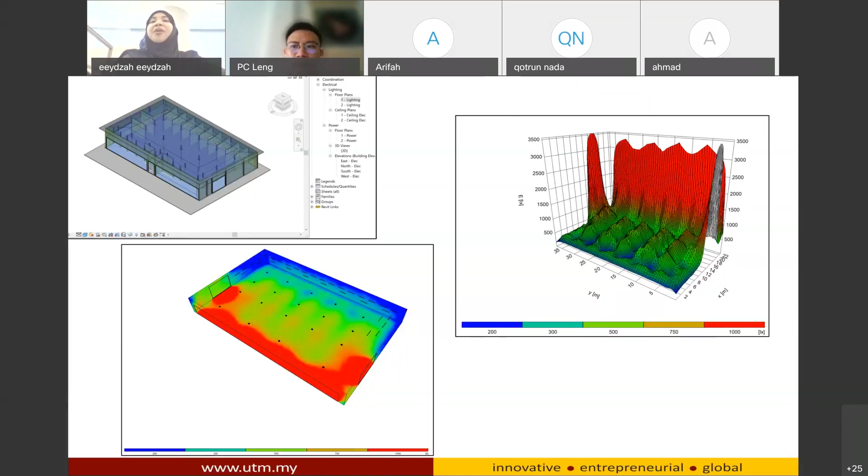So the integration of BIM with Revit: we are going to put in the thermal conductivity, the thermal performance that we got from our study, and combine it with energy management. That is the beauty of BIM, whereby we can have the simulation of the thermal performance for our building. So I'll just add in what is actually a continuous project that we can do.

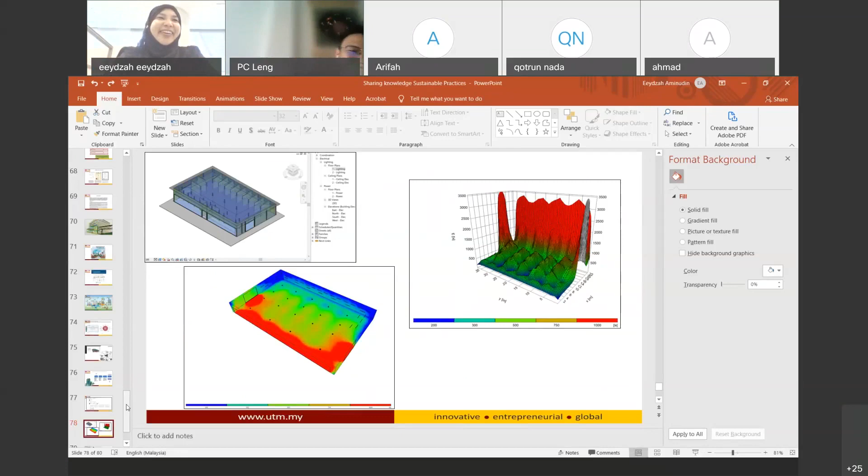The research is to understand the material part, and now we are looking into the simulation on the application part. So it's good for masters. If you want to continue for PhD, try to think of this kind of study. Am I right, Dr. PC? Yeah, you are right, Dr. Eeydzah. Because the potential and the future is there, about sustainability, about BIM and so forth.

Okay, students, anyone? Questions? Please shoot me one or two questions. At least I know that a part of you knows the lecture, right? Yeah. Maybe I ask first. Okay, all students still think about that.

Dr. Eeydzah, I still remember you participated in the competitions, right? So the use of bottom ash and POFA, first question, a silly question. What's the difference between these two, bottom ash and POFA itself? Is it the same thing or a different thing?

It's a different thing. Like I mentioned here, when we generate energy, when we talk about bottom ash, we're talking about coal. We use coal and burn it in the factory. The combustion that happens in the factory will create two kinds of ashes, the top ash and the bottom ash. POFA, palm oil fuel ash, is from palm oil. Palm oil also creates top ash and bottom ash. POFA is actually from the top ash, and the bottom ash is from the bottom.

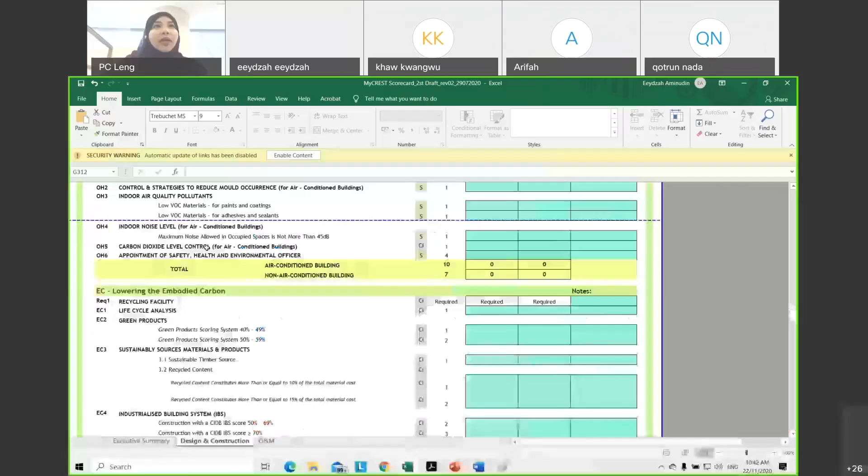If I may just share with you guys, all right, please check the MyCREST, okay? Because just now I did mention about MyCREST kan? Sebab dalam MyCREST, there is a part of element on sustainability. So guys, when you're doing your design, you can check on MyCREST. Okay, if you can see here, sustainability, kalau dia tengok, dia ada recycle content. So nowadays, kalau kita ada at least recycle content about 10% materials, you can get a lot of the scoring points over here.

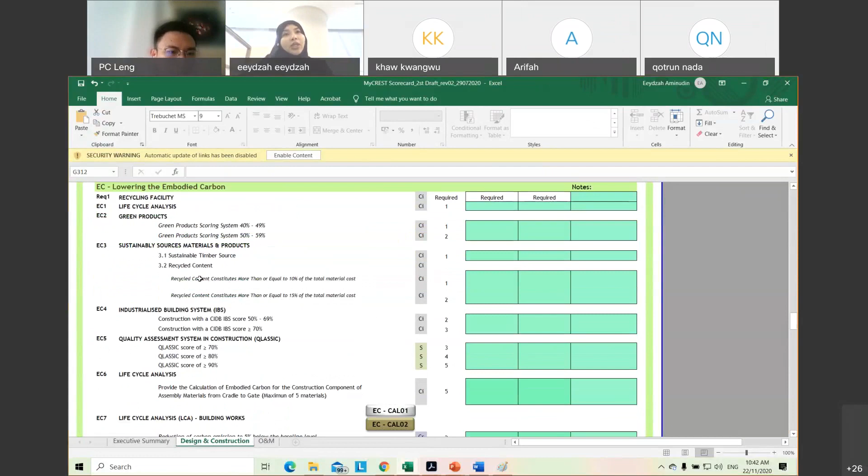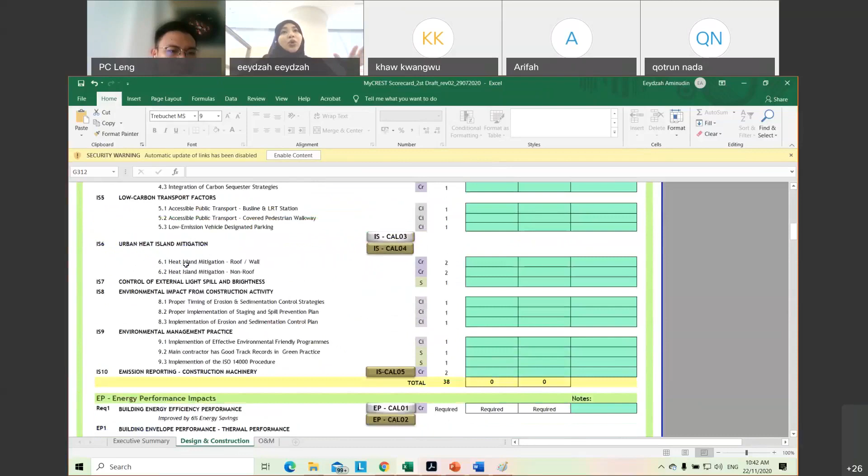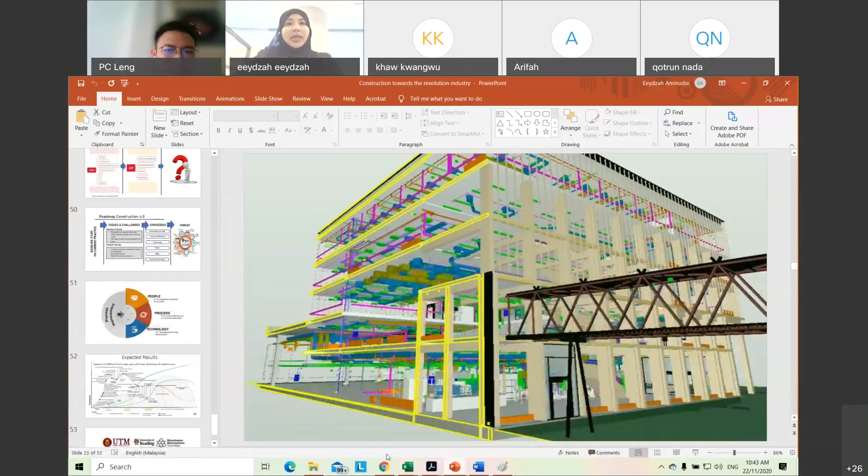So every time you guys build as architects, you kena tahulah all this recycle content because every time you design, you have to make sure you fulfill all the characteristics inside MyCREST. So MyCREST is quite huge, quite big. They're looking into pre-design, infrastructure, sequestration. If I may share the MyCREST info in general, but I think it's no longer here, dah tak ada. It's okay. But again, you guys can look into this lah. Maknanya because MyCREST memang every single material ke apa yang kita design, you have to fulfill.

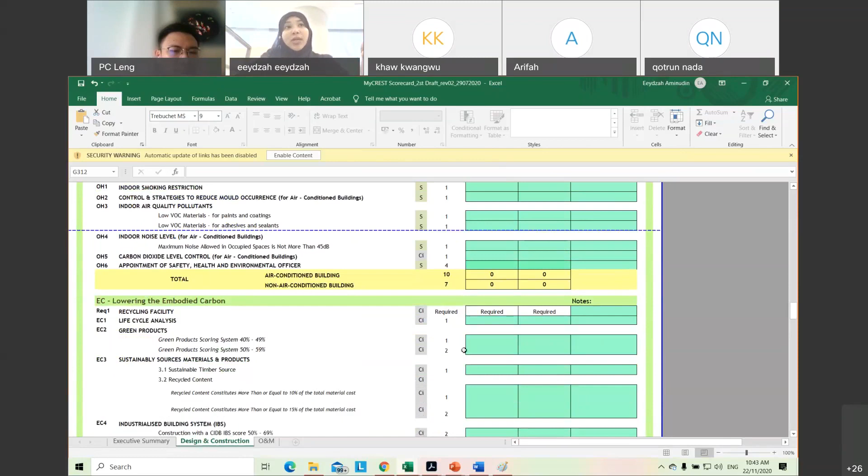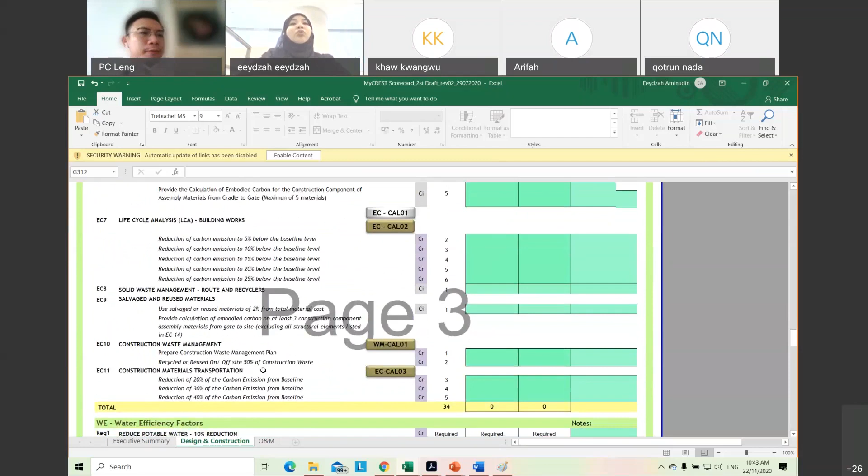Why I'm looking into the thermal comfort, I mean the insulation, because diorang pun ada lowering point of embodied carbon. Green products, if you use 40 to 49% of green products scoring, kalau 50 to 59 you can get 2 marks. If you use all those sourced materials, they're looking into the IBS scoring, the QLASSIC, the carbon emission, if you can show the carbon emission, the waste management, you are actually giving the point for MyCREST.

And I heard MyCREST is going to be compulsory because they're going to put it under the certification, green procurement. Yeah, green procurement. It's compulsory. I think when you guys study on sustainability, try to find out these green tools, because they're gonna put this as one of the requirements in our construction industry.

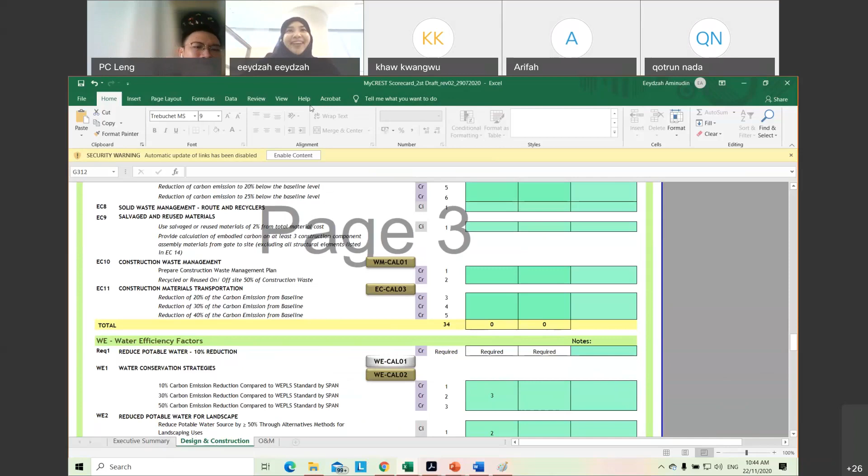Okay, thank you very much for sharing. I think this is also something additional. Yeah, MyCREST is like GBI, one of the green rating tools, developed by CIDB. So in Malaysia there are a lot of green rating tools. So I think it's good for you guys to understand each of them, at least the basics. Since Dr. Eeydzah has already introduced part of it, probably you can further study on that, and apply it when you're trying to design a sustainable building later, so do check on these criteria to see whether it's fulfilling the baselines of your green buildings or not.